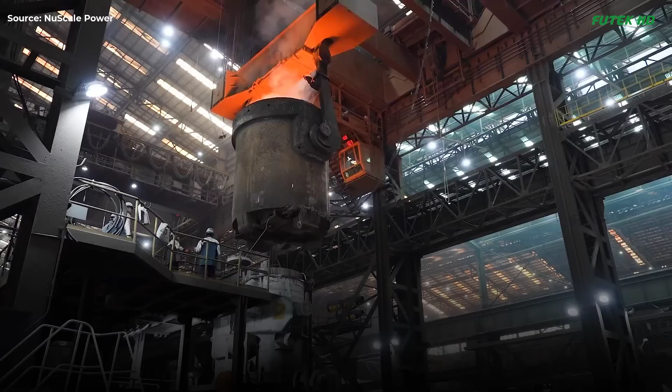Open die forging is a metalworking process where a metal billet is shaped between multiple dies that do not enclose the material entirely. This technique, also known as Smith forging, allows for the creation of large, simple-shaped components with improved mechanical properties due to the reduction in porosity and refinement of the grain structure.

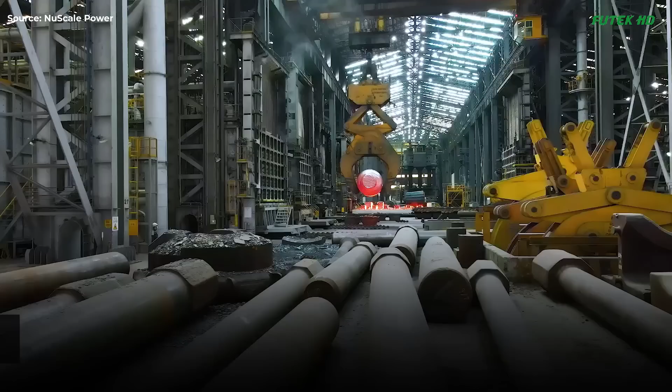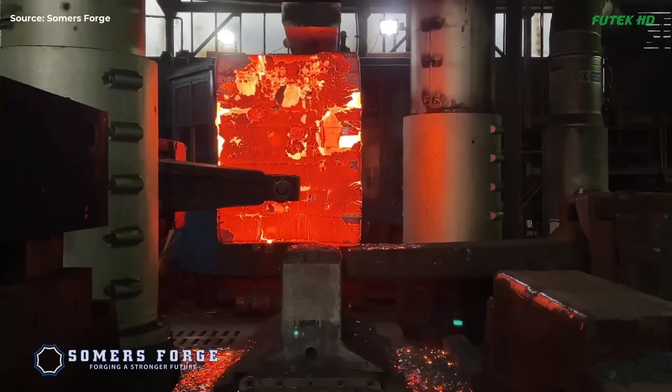One key advantage of open die forging is its ability to produce parts with exceptional strength and durability. This is achieved by applying repetitive compressive forces to the metal, typically heated to temperatures between 1000 and 1250 degrees Celsius, 1832 to 2282 degrees Fahrenheit, to gradually shape it.

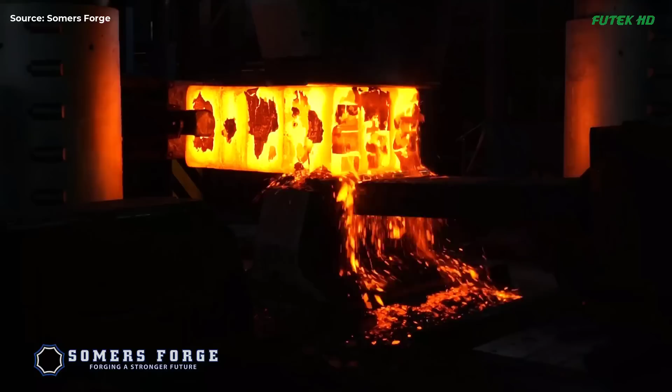The process relies heavily on skilled operators and large machinery, such as hydraulic presses and hammers. These machines can exert enormous pressures, ranging from 500 tons to over 6,000 tons, depending on the size and complexity of the part being forged.

The open die forging process can produce components weighing up to 200,000 pounds, approximately 90,718 kilograms, and with lengths exceeding 80 feet, about 24 meters. Commonly forged materials include carbon steel, alloy steel, stainless steel, titanium, and nickel alloys, selected based on the intended application's requirements.

This method is highly versatile, capable of creating a wide range of products, including shafts, flanges, hubs, and rings. For example, crankshafts forged through this process can weigh as much as 65,000 pounds, around 29,484 kilograms, and measure up to 36 feet, approximately 11 meters, in length. Similarly, forged rings used in aerospace and industrial applications can have diameters exceeding 30 feet, about 9 meters.

Open die forging offers several benefits, including improved mechanical properties, superior structural integrity, and the ability to produce very large parts. Despite its slower production rates and higher costs compared to closed die forging, it remains a crucial technique for industries requiring large, high-strength components.

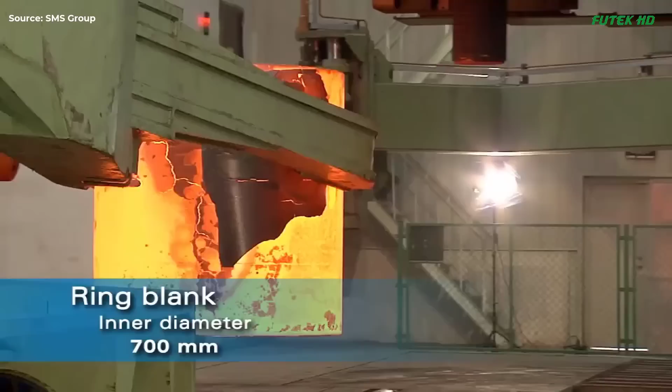The Radial-Axial ring rolling machine is an advanced piece of machinery designed to forge rings with high precision and efficiency. Operating on the principle of applying both radial and axial forces, it shapes the material into rings with excellent control over the final product's dimensions and properties. Key components of this machine include the main rolling mill, a hydraulic system, a control system, a heating furnace, and automated loading and unloading mechanisms.

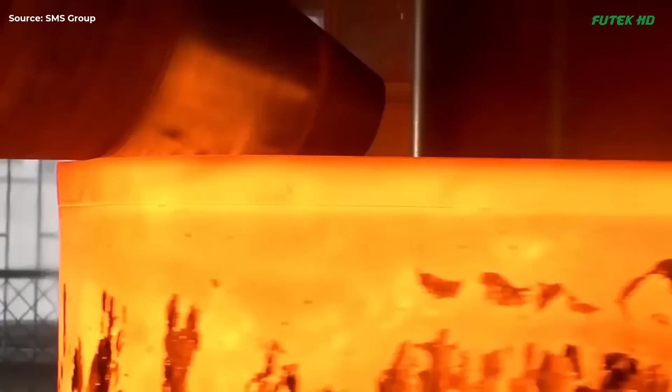The process begins with heating the workpiece, usually a preformed ring or blank, in the heating furnace to reach the desired forging temperature. This temperature is crucial as it makes the material malleable and easier to shape. Once the material reaches the appropriate temperature, it is automatically loaded into the main rolling mill. The loading mechanism ensures the workpiece is correctly positioned for the rolling process, initiating the radial rolling stage.

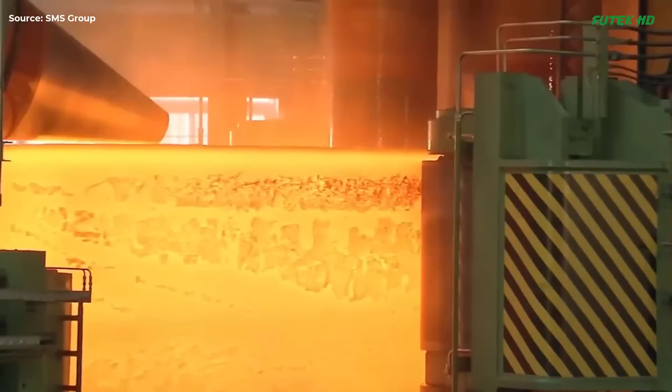During radial rolling, the radial roll moves towards the workpiece, applying pressure to its outer diameter. This pressure reduces the thickness of the ring while increasing its diameter. The computer control system monitors the rolling force and adjusts it as needed to maintain uniformity and precision.

Simultaneously, the axial rolls apply force to the side faces of the ring, controlling its height. This ensures that the ring maintains the desired axial dimensions while the diameter increases. The coordination between the radial and axial rolls is critical for achieving the required ring geometry.

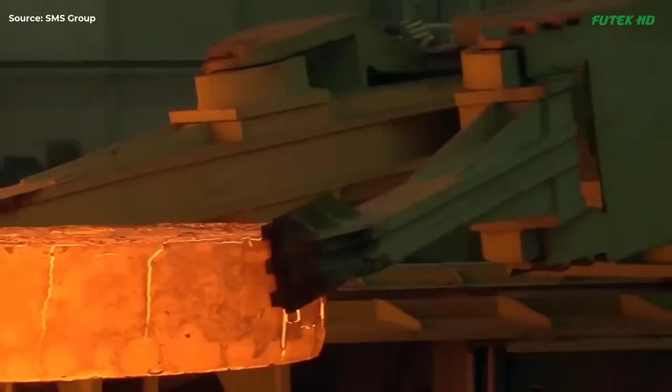Throughout the rolling process, the control system continuously monitors various parameters such as rolling force, temperature, and material deformation. It makes real-time adjustments to the rolling speed and force to ensure consistent product quality and adherence to specifications. After the ring reaches the desired dimensions, it is automatically unloaded from the rolling mill. The unloading mechanism ensures that the hot ring is safely removed and transported for further processing or cooling.

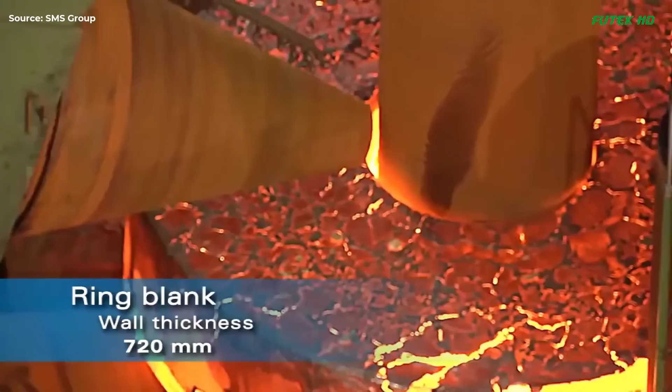The radial-axial ring rolling machine offers several advantages. Its advanced control system allows for precise adjustments during the rolling process, resulting in high-quality rings with tight dimensional tolerances. The machine's versatility is evident in its ability to handle a wide range of materials, including carbon steels, stainless steels, nickel-based alloys, and titanium alloys, making it suitable for various industrial applications. The rolling process ensures a fine grain structure and excellent material properties throughout the entire cross-section of the ring, enhancing its mechanical performance.

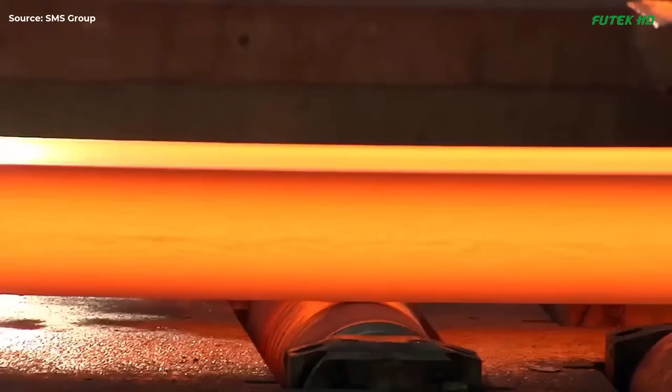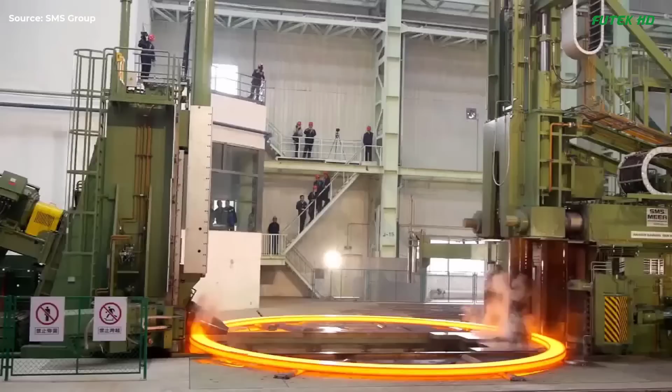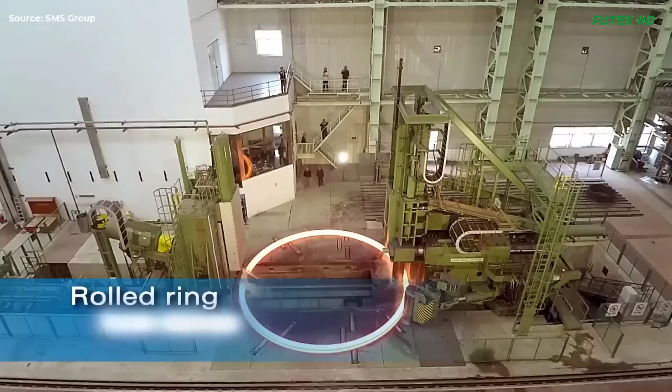Energy efficiency is another notable benefit. The machine's design allows for forging in a single heat, reducing energy consumption and increasing productivity. Additionally, it offers flexibility in production, suitable for both large batch and unit production, with minimal downtime when switching between different ring sizes and materials. The integrated plant concept allows the radial-axial ring rolling machine to be part of a complete forging line, including heating, loading, rolling, unloading, and control systems, providing a streamlined and efficient production process.

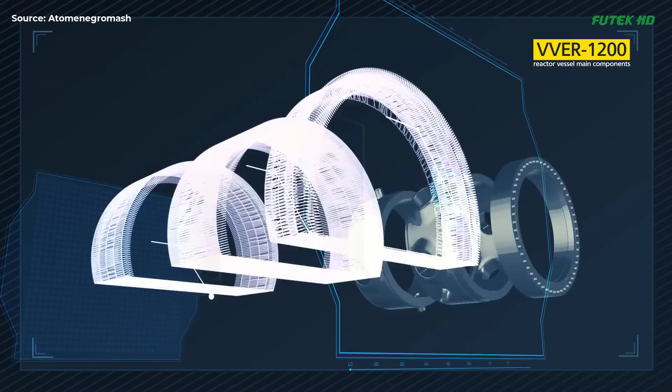The VVER-1200, a Russian-designed pressurized water reactor, represents the forefront of nuclear power technology. Its construction embodies sophisticated engineering and meticulous craftsmanship, ensuring a safe and efficient energy generation system. Central to the VVER-1200 is its reactor vessel, a critical component designed to withstand extreme conditions and ensure the reactor's integrity over its service lifetime of 60 years.

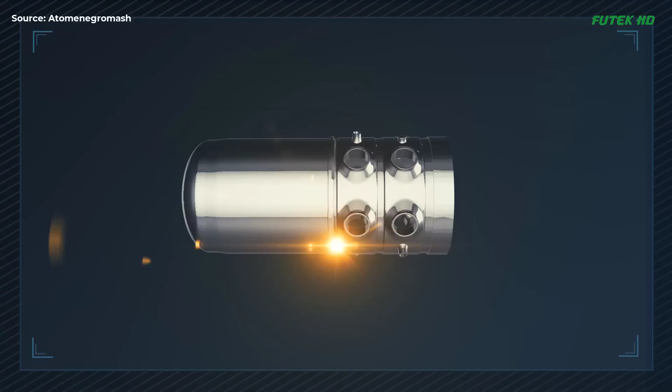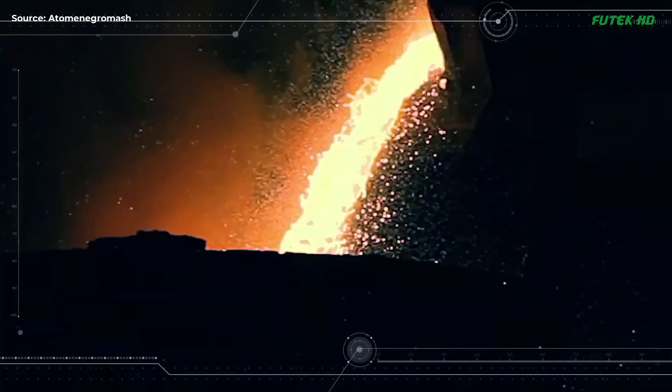Material and manufacturing. The VVER-1200 reactor vessel is constructed from pearlitic steel, specifically the 15Kh2NMFA grade. This material is chosen for its high strength and resistance to radiation-induced degradation. The manufacturing process begins with smelting and forging, producing ingots weighing up to 360 tons. These ingots are then processed using a press with a power of up to 15,000 tons force, ensuring the material's integrity and strength.

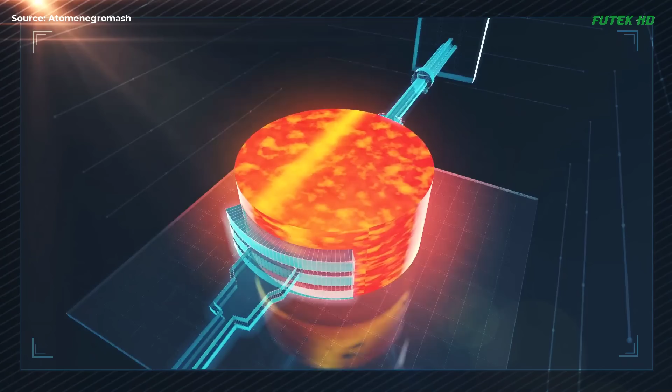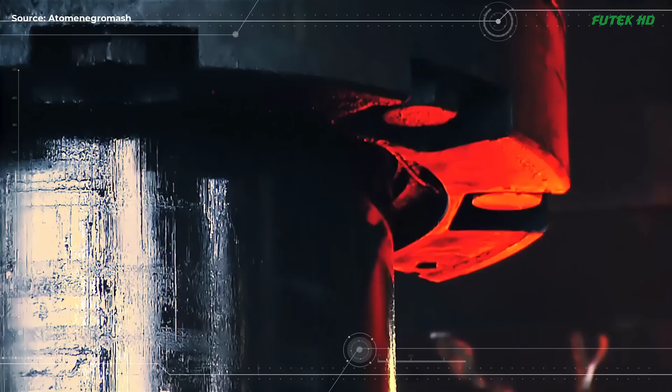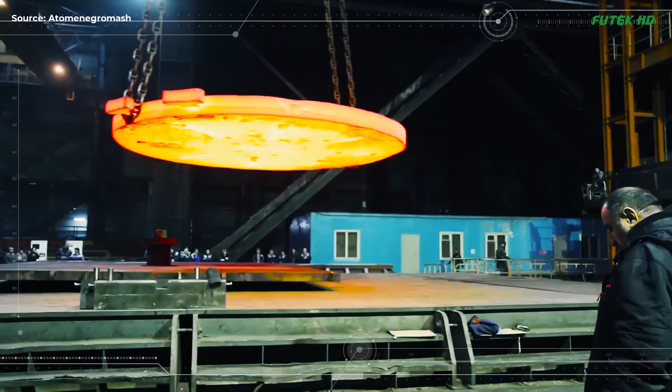Nozzle shell rings. The nozzle shell rings are among the most complex and essential parts of the reactor vessel. Each ring is integrated with multiple nozzles, including coolant inlet and outlet nozzles, which facilitate the circulation of the coolant necessary for maintaining optimal reactor temperatures. Additionally, the rings feature 5 emergency core cooling system (ECCS) nozzles, 1 of 850 mm diameter and 4 of 300 mm diameter. These nozzles are critical for injecting coolant into the reactor in emergency situations, preventing overheating and potential core damage.

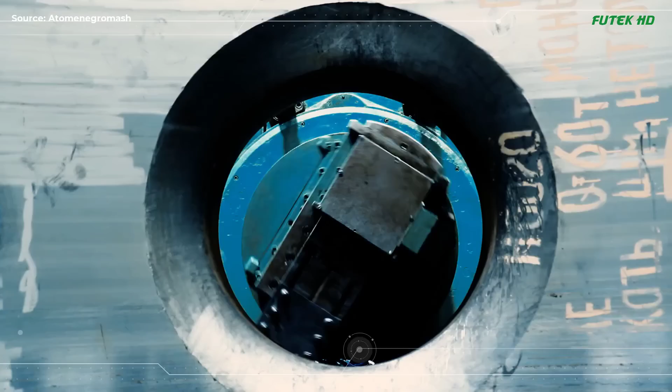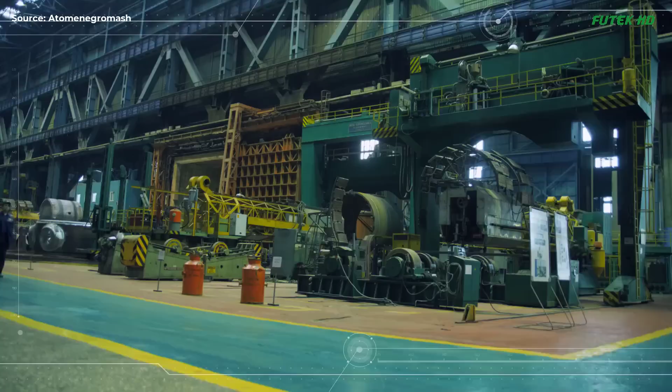Support shell ring. The third ring, the support shell ring, plays a pivotal role in the overall stability of the reactor structure. It includes a specially designed rim that supports the entire reactor assembly. This structural support is crucial, given the reactor vessel's substantial weight of 334 tons and its extensive height of 12 meters.

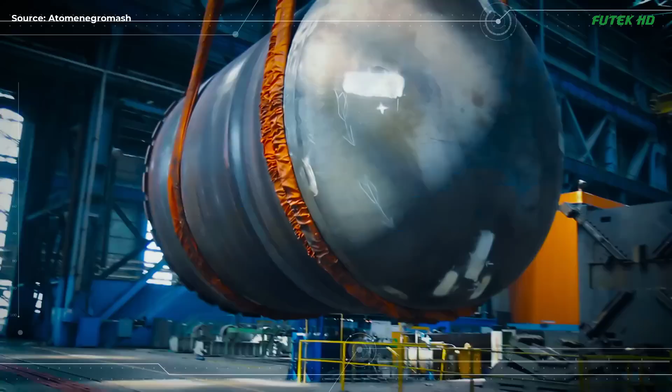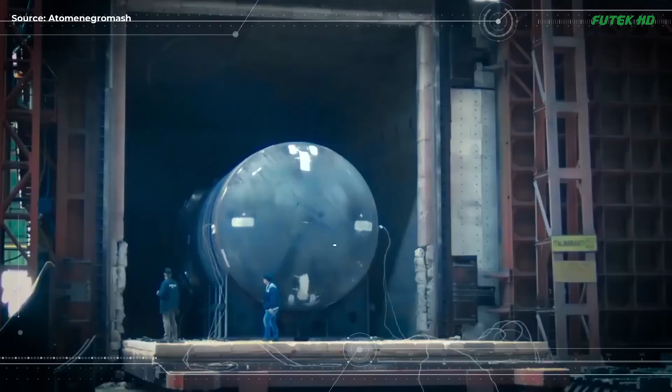Central shell ring. The central shell ring is subject to significant neutron irradiation throughout the reactor's operational life. Its exposure to high levels of radiation makes it a critical factor in determining the reactor's lifespan. The engineering and material choice for this ring are therefore of paramount importance, as they directly impact the vessel's durability and safety.

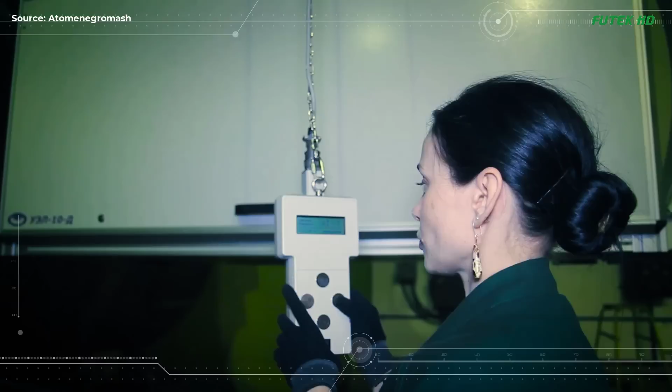Lower shell ring and bottom head. The lower shell ring and bottom head are integral to the reactor vessel's functionality. The elliptical bottom head is designed to support structures that hold the core fuel assemblies at precise distances. This precise placement is essential for maintaining the reactor's efficiency and safety. The lower shell ring, along with the bottom head, must endure extreme conditions, making their design and material composition critical for long-term operation.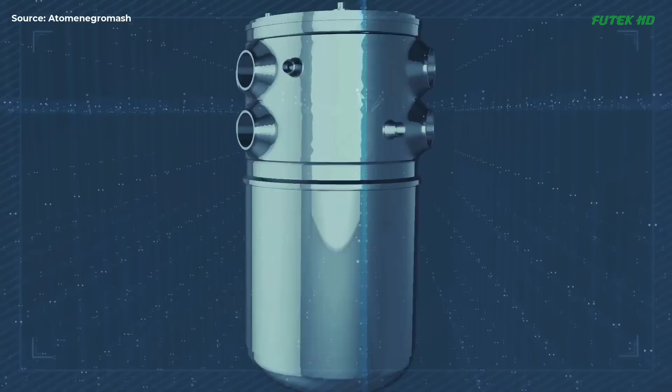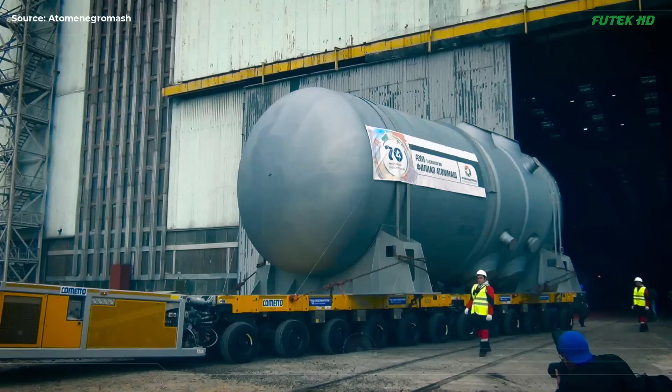Heat treatment and hydraulic pressure tests. Heat treatment is performed at around 650 degrees Celsius to relieve stresses and enhance the material properties of the reactor vessel. This is followed by rigorous hydraulic pressure tests to verify the integrity of the pressurized equipment.

The testing procedure involves filling the reactor with water, generating test pressure, and carefully reading instruments to detect any potential leaks or metal ruptures. The reactor vessel must withstand pressures ranging from 254 to 304 atmospheres without any detected leakages or ruptures, ensuring its reliability under operational conditions.

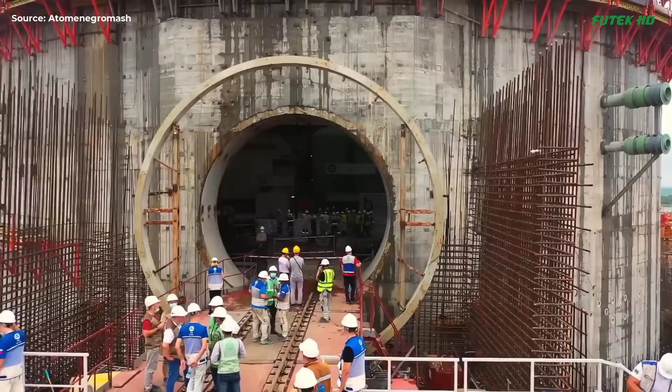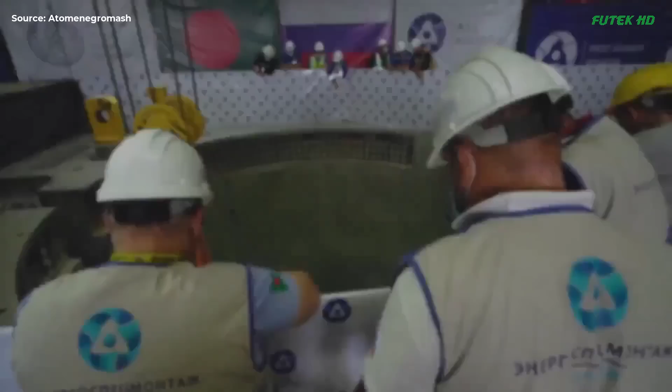Operational specifications. The VVER-1200 reactor vessel is designed to handle an outlet reactor coolant temperature of 328.9 degrees Celsius. This high operational temperature is essential for efficient energy production, requiring the vessel to maintain its integrity under extreme thermal conditions. The vessel's large dimensions, 4.5 meters in diameter and 12 meters in height, coupled with its weight of 334 tons, underscore the engineering challenges involved in its construction.

The ITER, International Thermonuclear Experimental Reactor, project represents a monumental step forward in the quest for sustainable and clean energy through nuclear fusion. Central to the construction of the ITER tokamak, a device designed to harness the power of fusion, is the manufacturing of the vacuum vessel, VV. This component is a crucial element that forms the heart of the reactor, housing the superheated plasma in which fusion reactions occur.

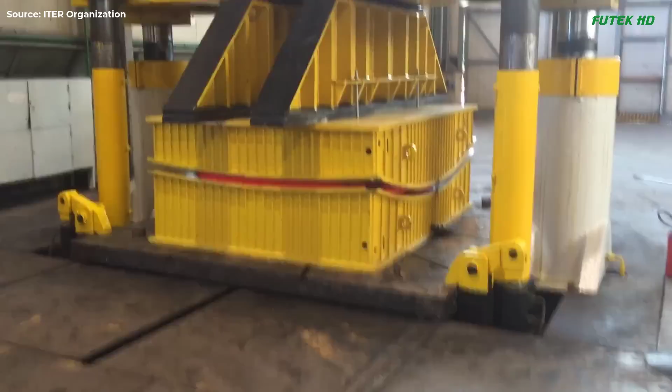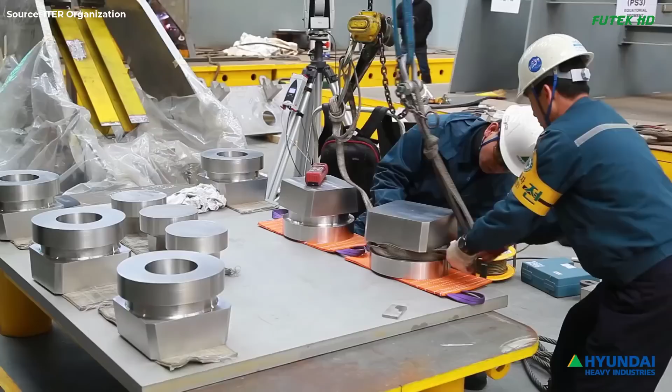The procurement and assembly of the ITER vacuum vessel are shared between Europe and Korea, with Europe responsible for 5 sectors and Korea for 4. Manufacturing milestones in Korea. Hyundai Heavy Industries, HHI, in Ulsan, Korea, has made significant strides in producing these complex structures. The company recently finalized the first of the 9 vacuum vessel sectors required for the ITER tokamak. As of now, Korea has completed 3 of these 40-degree sectors, with a 4th sector nearing completion at over 90%.

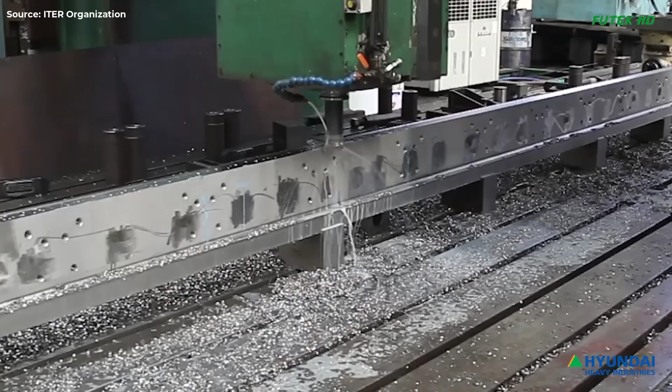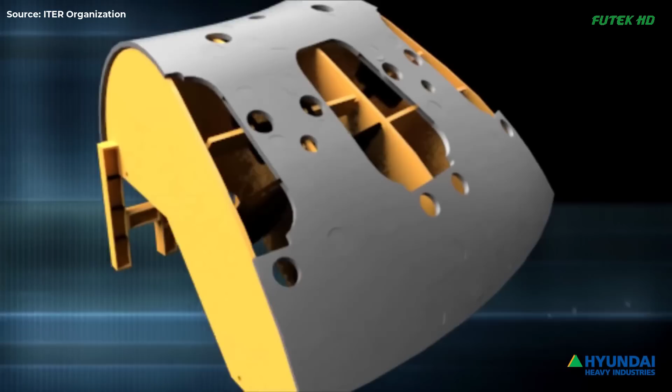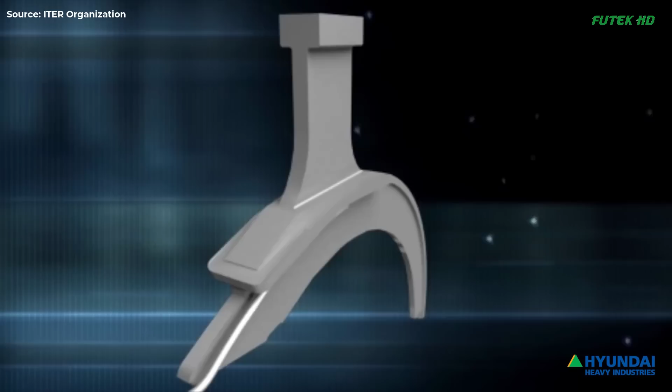The manufacturing journey for each sector is a testament to advanced engineering and meticulous quality control, given the stringent requirements and challenges involved. Each sector of the vacuum vessel weighs approximately 440 tons. These massive structures undergo rigorous manufacturing processes, including cutting, welding, and assembly, before being encased in protective housing and prepared for shipment. The completed sectors are transported via a combination of boat, barge, and road to the ITER site, where they undergo site acceptance testing and pre-assembly activities before being installed in the tokamak pit.

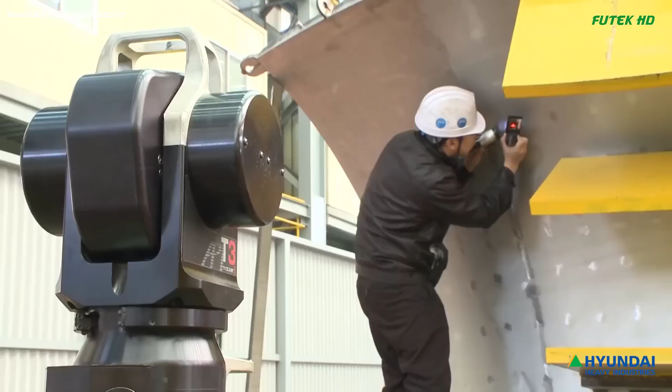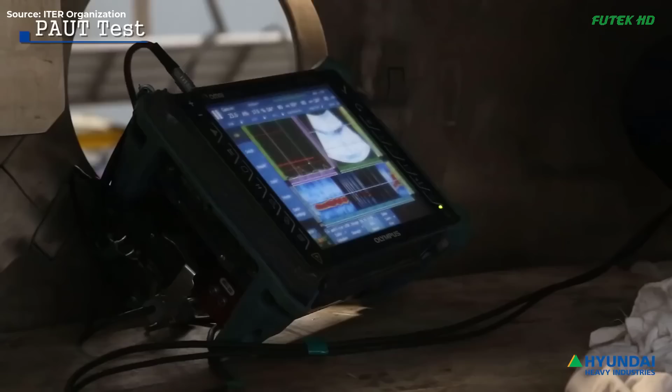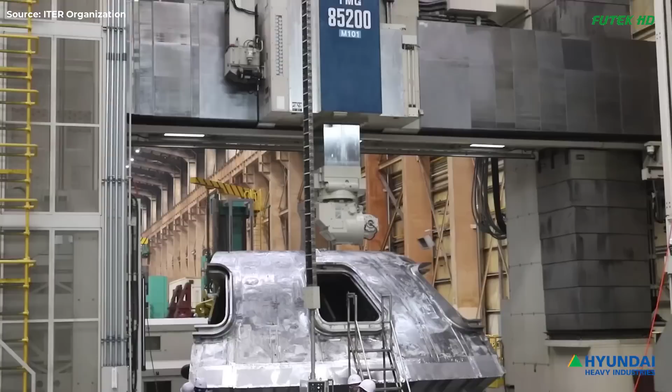Key manufacturing challenges. The production of the ITER vacuum vessel sectors is a first of its kind, FOAK, endeavor, presenting several unique challenges. 3 main hurdles are particularly noteworthy. Nuclear safety process. The vacuum vessel must comply with French nuclear pressure vessel standards, necessitating rigorous approval of all applicable documents by the Korea Domestic Agency, KODA, the ITER organization, IO, and the agreed notified body, ANB. This process involves multiple qualifications, demonstrations, and certifications to ensure adherence to essential nuclear safety requirements.

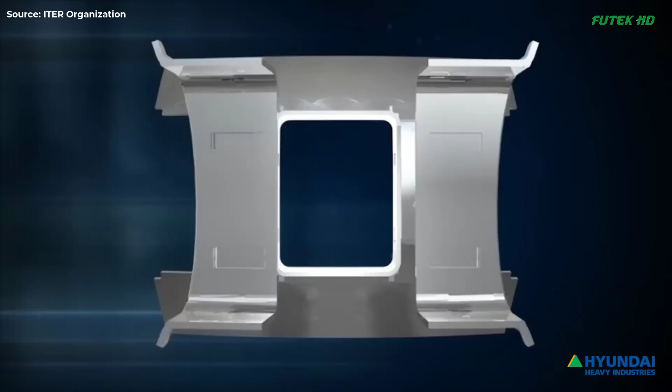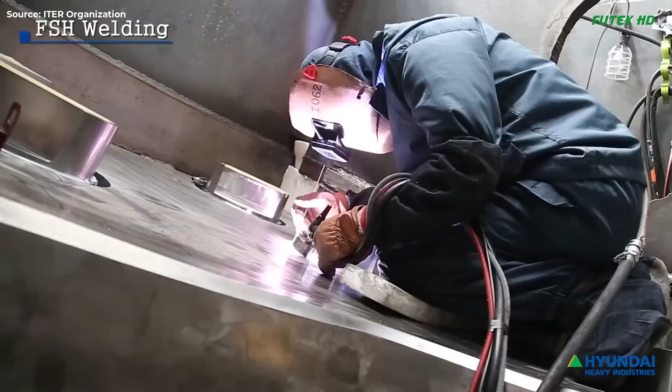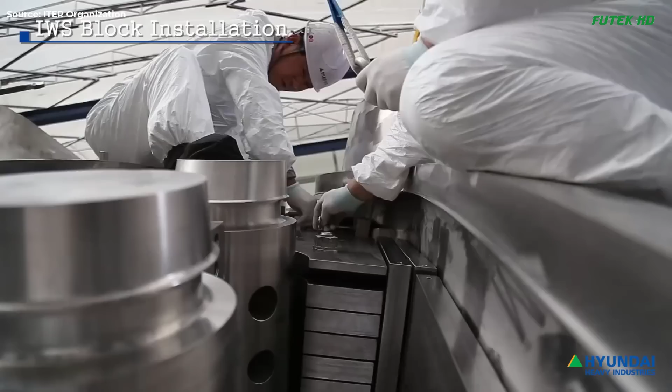Maintaining traceability for all activities is crucial, with each manufacturing step inspected and recorded by resident inspectors from the Vacuum Vessel Project Team, VVPT, and ANB. Volumetric examinations. Ensuring the integrity of the double-walled, fully welded structure with its complex 3D geometry requires 100% volumetric inspections. For Sector Number 6 alone, the HHI team executed approximately 995 meters of full penetration welds, supported by 20 welding procedure specifications and 60 specialized scanning techniques using phased array ultrasonic testing, PAUT.

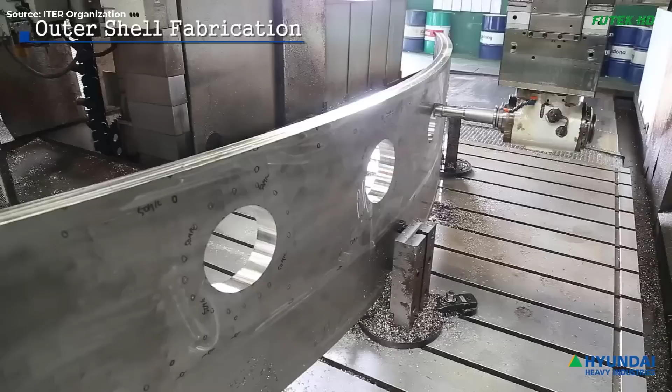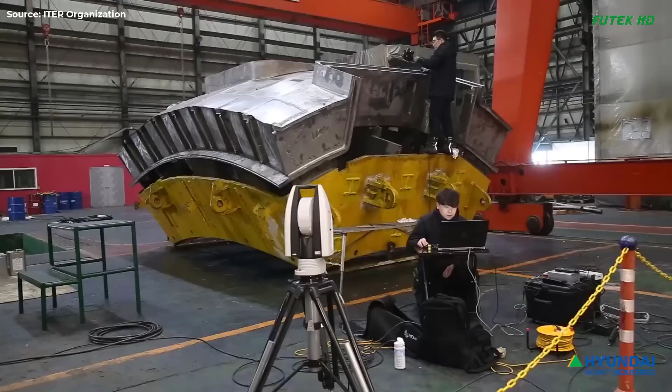Tight tolerance requirements. Achieving the precise dimensions required for the final assembly of the D-shaped vacuum vessel is particularly challenging due to the heavy, double-walled segments and their inherent deformations during manufacturing. To address this, the HHI team collaborated with VVPT to perform virtual fittings using actual dimensional data, defining target positions for each fiducial post on the poloidal segments, PS, before commencing the final assembly.

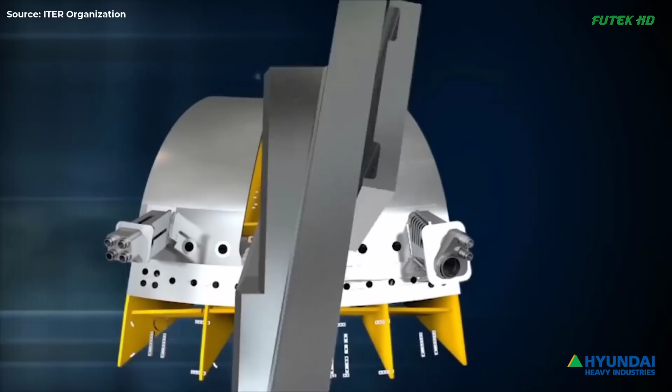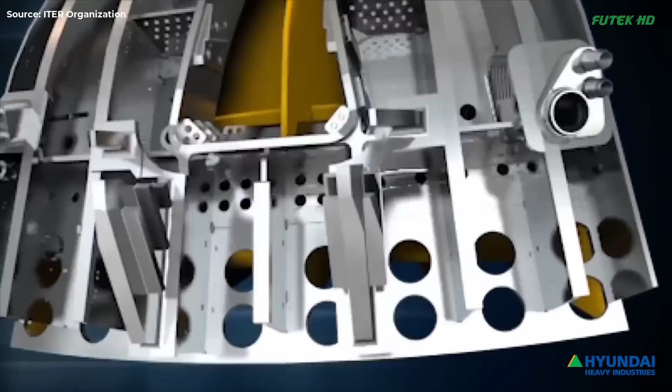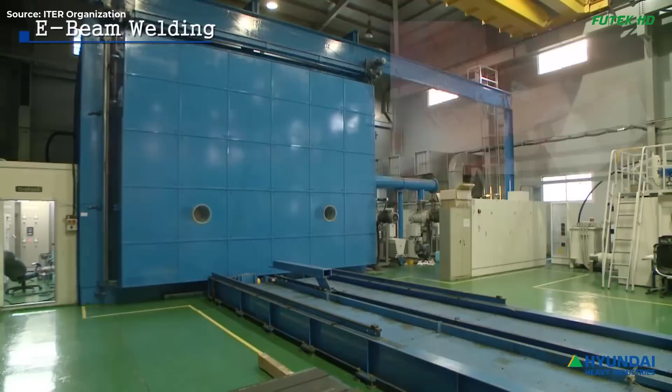Quality assurance and testing. Quality assurance for the vacuum vessel sectors is paramount, given their critical role in the ITER reactor. Each manufacturing activity is controlled through a manufacturing inspection plan, MIP, documenting all processes and ensuring adherence to quality control measures. During the production of Sector Number 6, 45,000 inspection points were executed, and 500 manufacturing documents, including reports, were developed. A crucial part of the final acceptance testing for the vacuum vessel sectors is the helium leak test, ensuring the vacuum performance meets stringent safety standards.

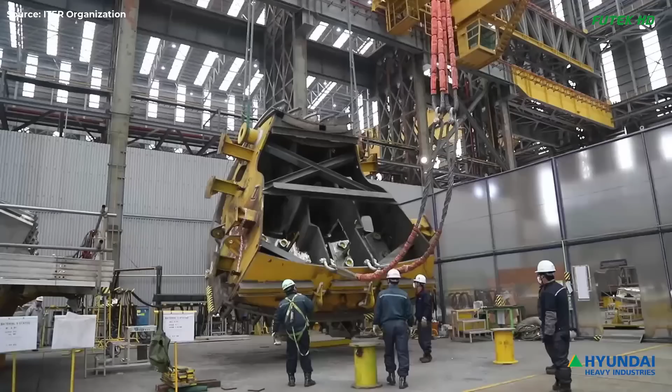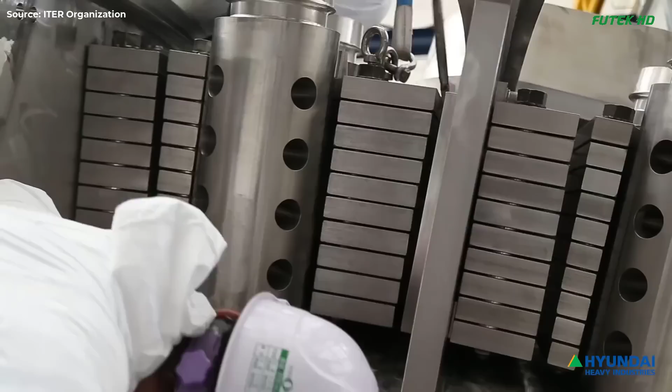Initially, a 200 degrees Celsius baking process was considered essential to achieve a low background leak rate. However, given the risks associated with baking, the decision was made to perform the leak test without it. Instead, pre-pumping the VV interspace demonstrated that the background leak rate and total pressure were sufficiently low to conduct the test. The successful helium leak test on April 5, 2020, confirmed the sector's integrity, with a calculated leak rate of 6.08 × 10⁻⁹ Pa·m³·s⁻¹, well within the acceptance criterion.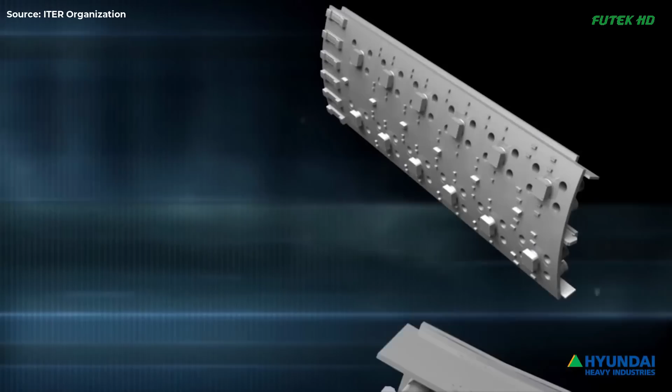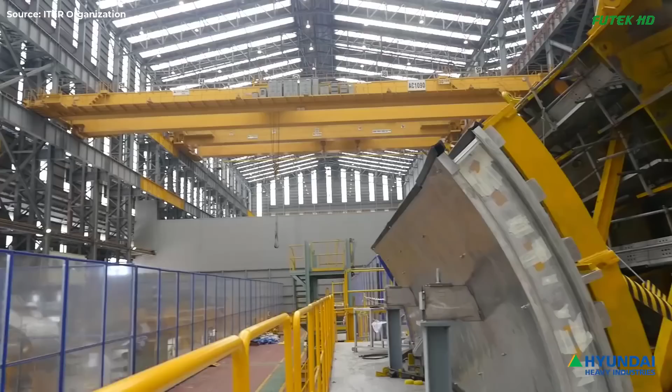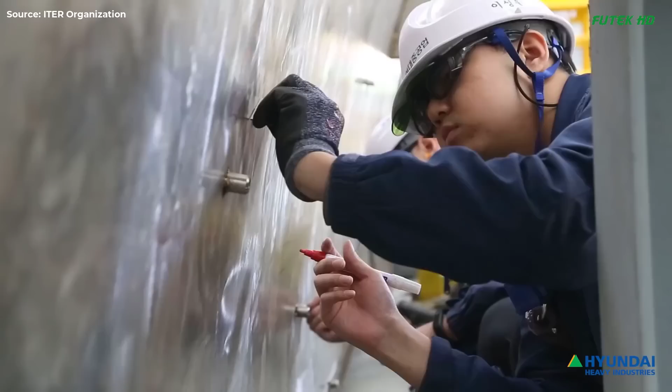Logistics and transportation. Transportation of the vacuum vessel sectors is another complex aspect, classified as a protection important activity, PIA, under French nuclear regulations. The detailed transportation plan, including quality and inspection plans, must be approved by VVPT and ANB before implementation. After successful sea transport, Sector Number 6 was unloaded in Fos, France, on July 22, 2020, and delivered to the ITER site on August 7, 2020. Unpacking and site acceptance tests, including another helium leak test, are conducted at the ITER Assembly Hall, following a meticulous assembly schedule.

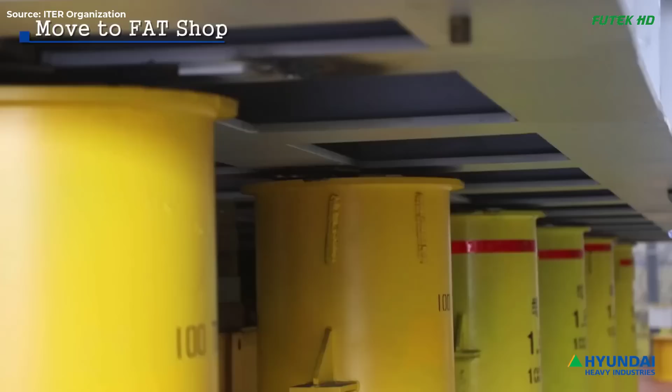The manufacturing process of a flange begins with steel billets, which are long bars of steel that serve as the raw material. These billets are cut into smaller pieces. The cut billets are then heated in a furnace to a high temperature, making them malleable for forging. In the hammer forging process, the heated billet is placed on a forging die and repeatedly struck by a power hammer. This process shapes the billet into the rough shape of the flange. After hammer forging, the flange undergoes punching, where a hole is created in the center.

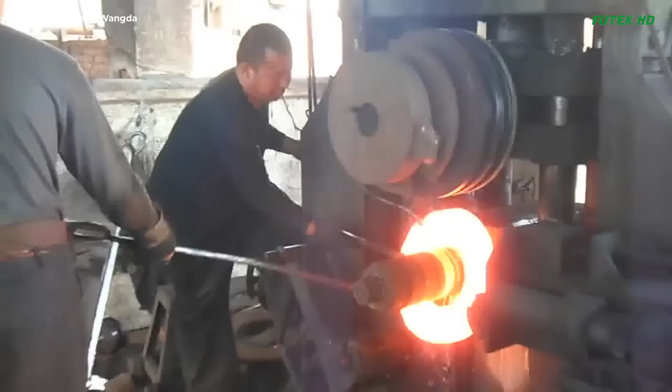Next, the roughly shaped flange is subjected to rolled forging to achieve its final shape. The piece is heated again and placed between two rotating rolls, one fixed and one adjustable. As the rolls rotate, the billet is compressed and elongated, forming a ring shape. This process refines the dimensions and improves the grain structure of the metal, enhancing its strength and durability. Rolled forging is especially important for ensuring that the flange has a uniform cross-section and meets the required specifications.

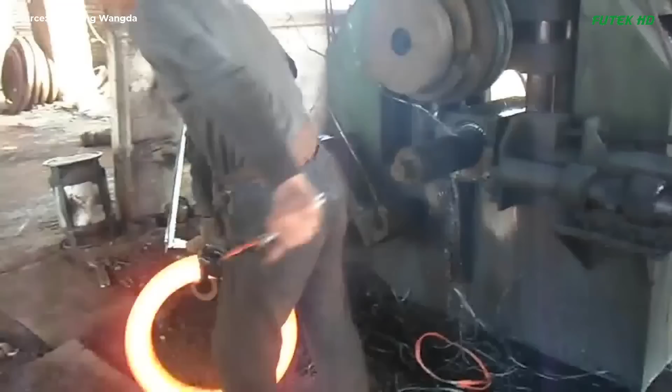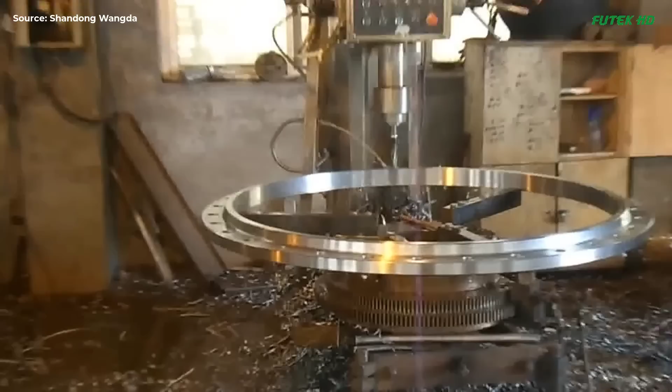The final stage of flange manufacturing involves machining, which includes precise operations like turning, milling, drilling, and finishing. In the machining process, the forged flange is mounted on a lathe or milling machine where it undergoes turning to achieve the required outer diameter and surface finish. Milling may be used to create any necessary flat surfaces or additional features. Drilling is a critical step where bolt holes are created around the flange's perimeter. These holes must be accurately placed and sized to ensure proper fitment with mating components.

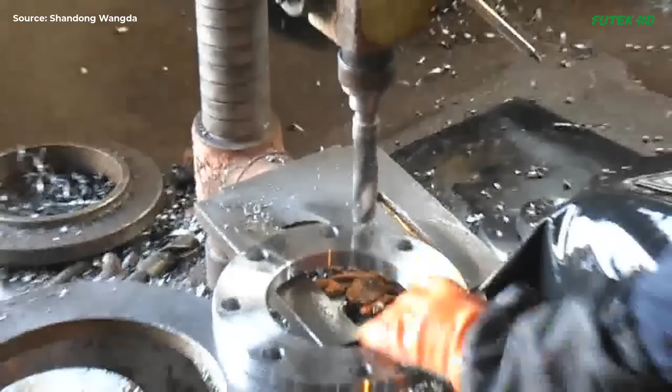The flange may also undergo threading if needed for specific applications. Finally, the flange is finished through processes like deburring, polishing, and coating to enhance its appearance and resistance to corrosion. Quality control checks are performed at each stage to ensure the flange meets the required standards and specifications.

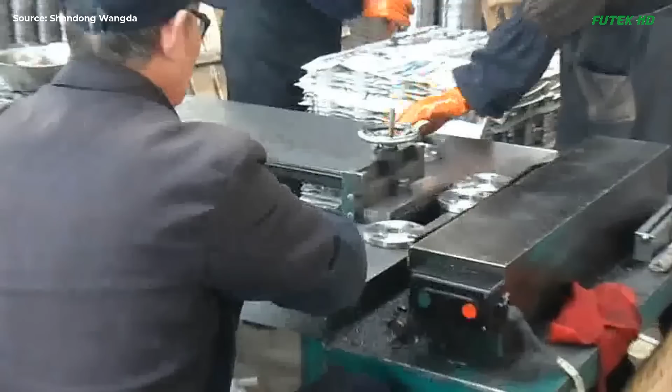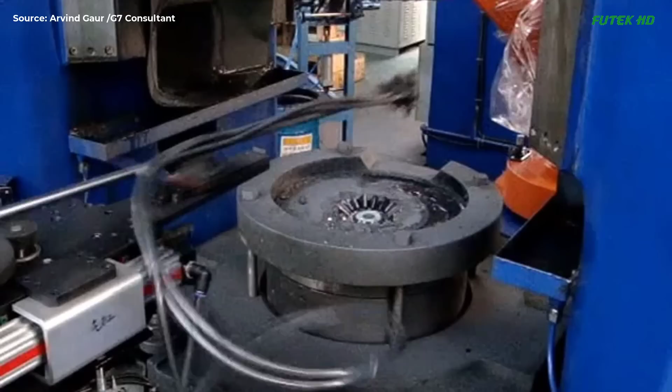Gear forging is a manufacturing process where metal is shaped under high pressure to create gears. This process typically involves heating the metal to make it more malleable, then using dies to form the gear's shape. Forging produces gears that are stronger and more durable compared to those made by casting or machining. The grain structure of the metal is aligned during forging, enhancing the gear's mechanical properties, such as toughness and resistance to impact and wear.

Two common methods in gear forging are open die forging, which is suitable for large gears, and closed die forging, which is used for smaller, more precise gears. The precision and strength of forged gears make them ideal for high-stress applications, such as in automotive transmissions, aerospace components, and heavy machinery. Additionally, the forging process can reduce material waste and machining time, leading to cost savings in large-scale production.

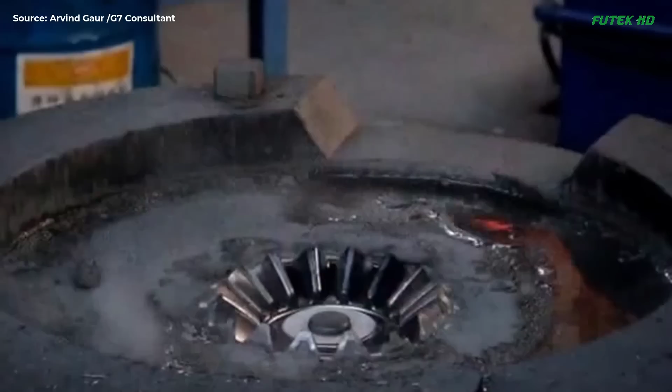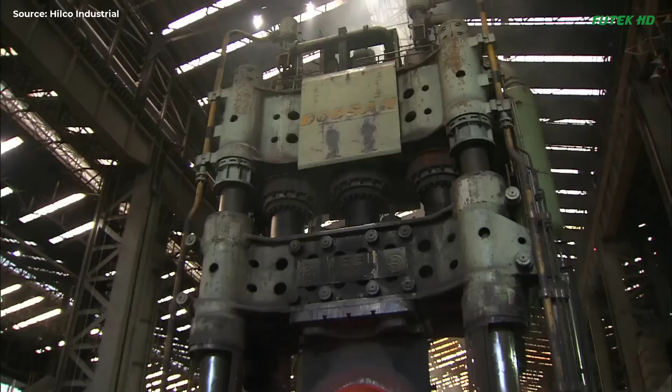The 13,000-ton forging press from Doosan Heavy Industries, manufactured by SMS Meer in September 1982, is a monumental piece of engineering designed for open die forging. This press, a 4-column pushdown type, operates using water hydraulics, which offers advantages in terms of power and precision. With an impressive capacity of 130 meganewtons, 13,000 tons, this press is capable of handling some of the most demanding forging tasks, making it essential for industries requiring large and complex metal components.

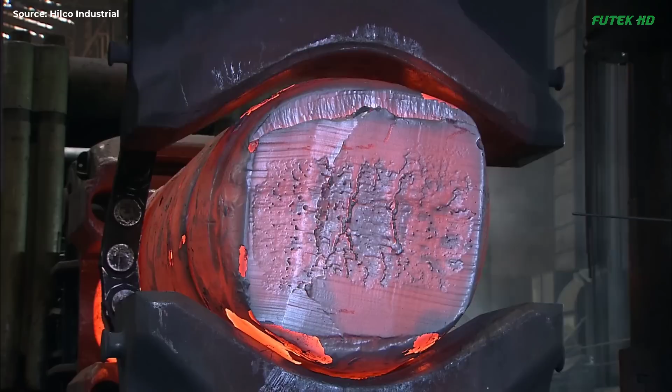The maximum press stroke is 4,500 millimeters, allowing for significant deformation of workpieces in a single operation. This large stroke capacity is crucial for producing long or thick forgings without the need for multiple strokes, thus increasing efficiency and reducing the time needed for each piece. The press boasts a daylight of 8,000 millimeters, which refers to the maximum distance between the upper and lower press platens when the press is fully open. This substantial daylight is essential for accommodating large workpieces and tooling, enabling the press to handle a wide range of sizes and shapes.

Additionally, the distance between the columns, measuring 6,750 millimeters by 2,650 millimeters, provides ample space for maneuvering and positioning workpieces, further enhancing the versatility and functionality of the press. This spacious design is particularly beneficial for forging large and complex parts that require precise positioning and alignment during the forging process.